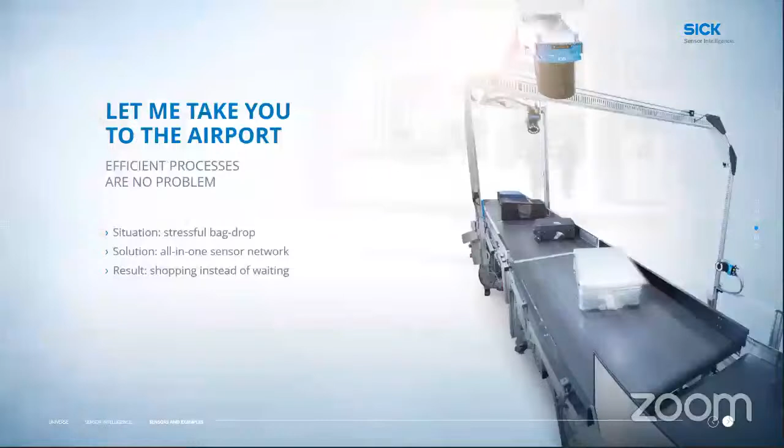So how can these companies benefit? We'll go through a few big examples you've probably already seen. So we'll take you to the airport. Most people aren't going to the airport very often these days, but we've created a lot of the systems with the airports to track your luggage. So as you now see the Industry 4.0 on your phone, where it says your bag has left this terminal or it's at this place - those are our solutions with not only barcode reading, but lately with RFID that you'll see soon from the other groups.

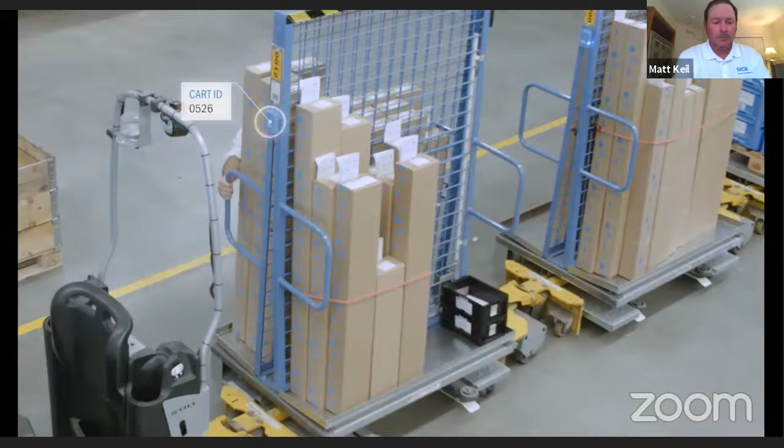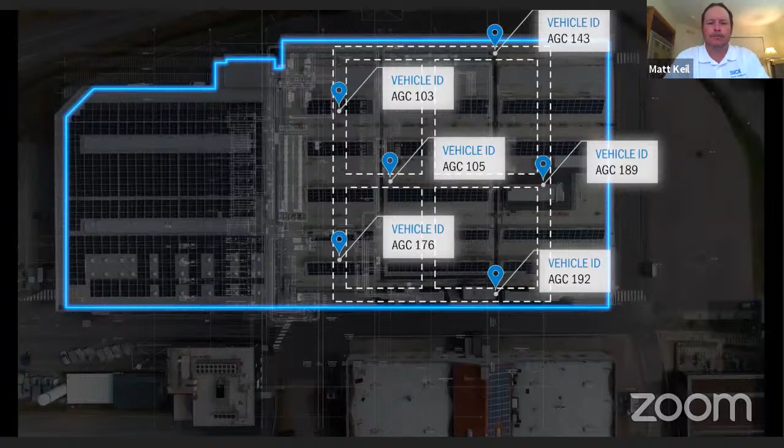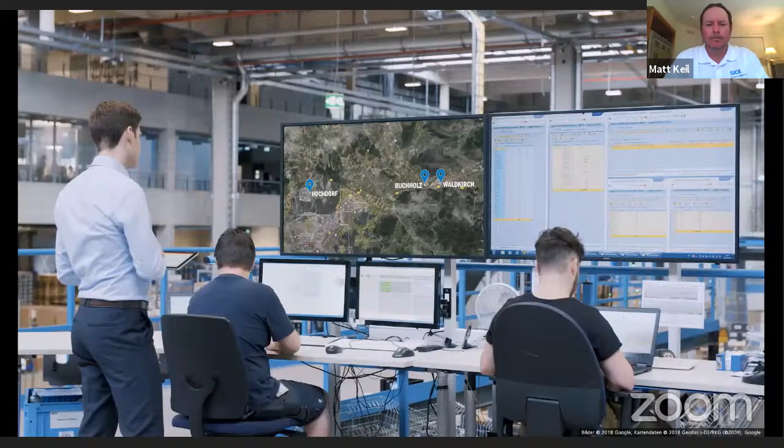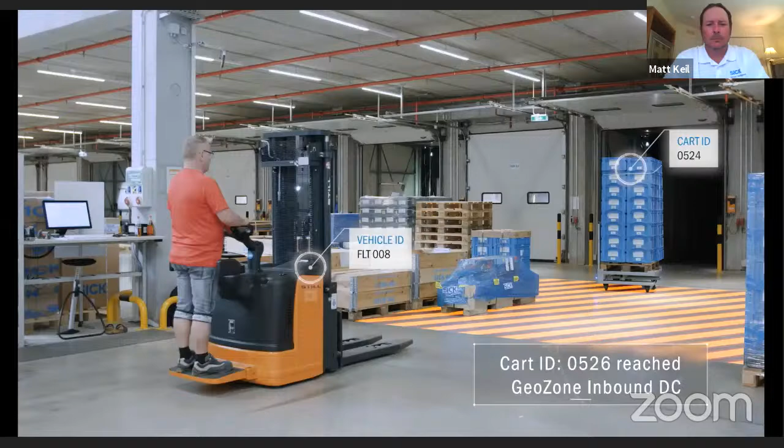Other conceivable applications are now in the planning stage. This is a flexible way of reacting to changing work processes, always with a focus on saving time and reducing costs through transparency. SICK uses a gateway system with GPS technology from its own portfolio for tracking company internal transport between different locations. In this way, we bring outdoor and indoor tracking together. In our own smart factory, we use either laser measurement technology or line guidance from our mobile platforms, depending on the requirements for positioning accuracy. Proven technology for automated guided vehicle systems. Localization is all about performance and accuracy. Our vision for the future is not fully automated production. Instead, it always includes a human, manual part of the work process. It will be about collaboration instead of competition, hand in hand, the best of both worlds. Transparency is therefore provided in both manual as well as fully automated processes, a guarantor for reliably provided knowledge on the shop floor. In the distribution center, material flow processes are managed with the help of localization solutions. In addition to controlling industrial trucks, there are also possibilities of locating goods that have not been tagged, because SICK has one of the broadest sensor portfolios for localization. For example, LIDAR technology is used to locate and track entire transport units in an area. This is real added value. With LIDAR's help, all moving goods on the shop floor that are not currently being tracked in a track-guided process can be detected and reliably assigned. Localization by SICK means that nothing remains unseen, all with the aim of transporting goods well, quickly, and safely to the customer. SICK goes further. Step by step, we are increasing our indoor localization capabilities and connecting them with the outside world. In this way, we are connecting the physical with the digital world, and our own world with that of our customers.

All right, pretty cool. I wish I would have turned the sound on earlier, but let me share my PowerPoint now. Make sure... there we go. All right.

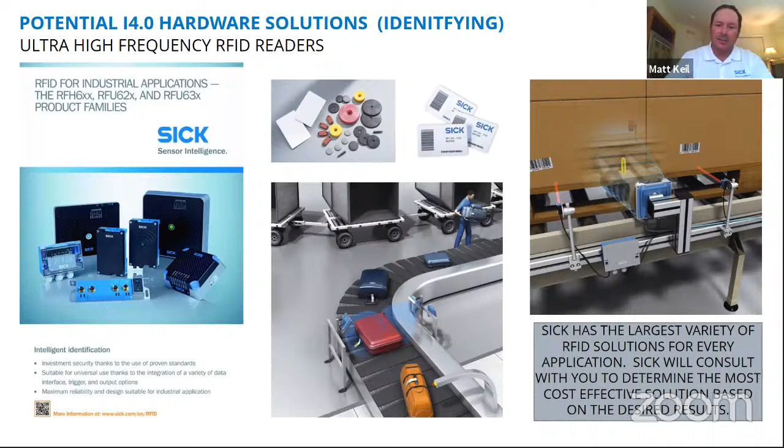The first is really the ultra high frequency RFID. That's been the game changer of moving to a long range RFID system so we can track things at a great distance or within a major pallet. The next major focus is going to be on LIDAR. What SICK did was, because of safety scanner technology that we tried to create planes with, we were one of the first to actually create LIDAR solutions that everyone's using now for autonomous vehicles.

Also different vision systems and simple proximity laser switches. One of our newest solutions that everybody seems to be jumping on because of its capabilities is our ultra wideband solutions. Now we have the ability to take tags throughout an entire facility, or even phones. I know a lot of phones are coming out with ultra wideband capability, and we can tag, localize assets, equipment, inventory, and even people.

Some of the stuff I was on a podcast or webinar about earlier this year regarding the new normal, and some of the things we're doing with localization, where we're actually tracking and tracing people within facilities to understand if different areas have been cleaned, or different areas where people have been in contact.

The other thing we have to have is a gateway to get these things to the cloud. So we'll talk a little bit about some of our GPS, our wireless technologies, our different gateways, and IO-Link, linking all those things together, so they're easily programmable.

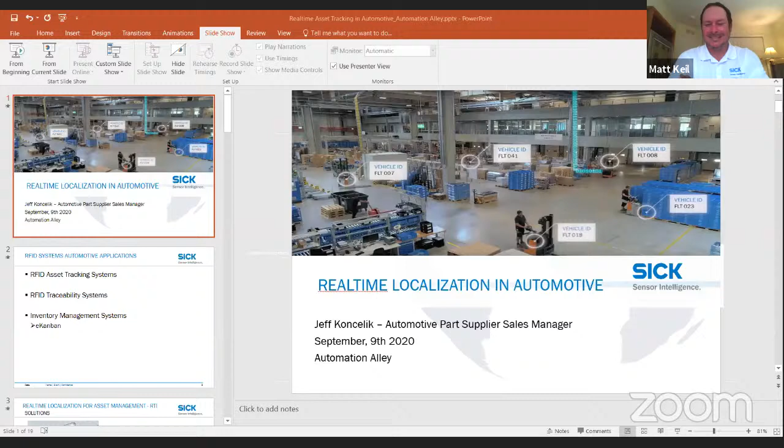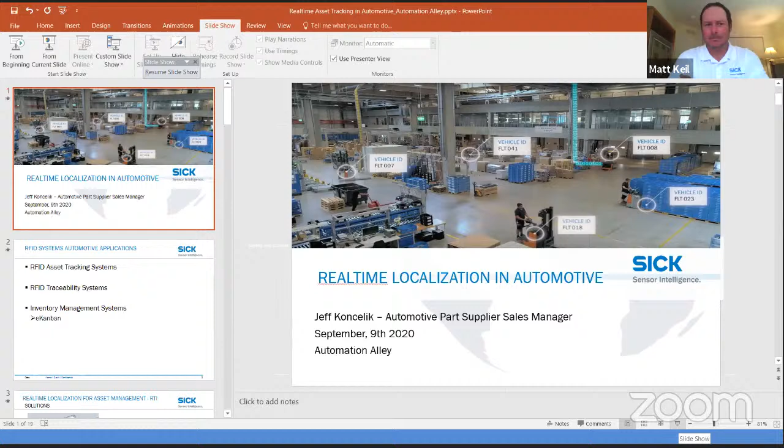So as Matt talked... and my screen's not moving. Okay. I'm going to stop sharing and try to share again. My screen seems to be locked up. Sorry about that. Virtual tech takeovers, yeah, there we go. All righty, let's see if this is going to work, hopefully.

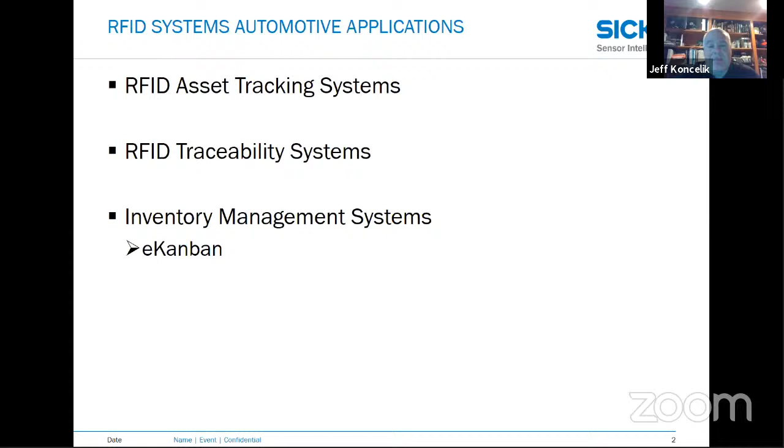So as Matt mentioned, we do have a lot of different technologies. I'm going to focus basically on the RFID systems that we have. Back in the day, RFID was basically for pallet detection, just 1, 2, 3, what pallet. We're getting into, you've heard the term asset tracking quite a bit. We're going to look at two different solutions, RTI and eKanban. These we see as trending applications that we're seeing a lot of visibility with our customers at the current time.

For those who don't know what RTI is, it's basically parts in a crate leaving one station, A, to go to position B, and that can be in your facility, leaving to load a truck, and then that part being accepted at a major end user. Or vice versa. You can also do shelving and things of that nature. Anything that would have a tag, we can track. Within our system, we can identify all the parts in the crate. We're not unlimited, but we do have a very high cycle, and it depends on the part size and things of that nature. We're seeing this application come into play, and we'll jump into more detail coming up.

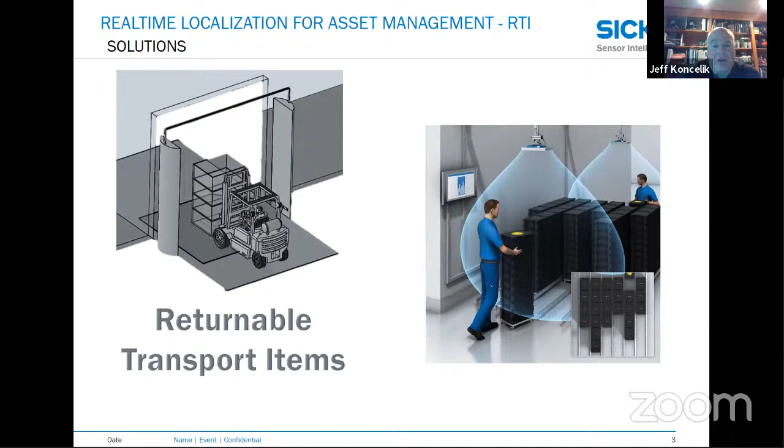The second one I mentioned was eKanban. If you know what Kanban is, it's basically a feeder system for raw material in an assembly. Typically they would have a card within each of these boxes or totes identifying what that part is. The problem is, in the manufacturing process, you don't know when you run out of parts, and it's a visual accountability to see when that change has to be made, and then you have to make a call to someone to bring more parts.

In our system, it's all RFID. We follow the parts through the manufacturing process, so we know if the tote has, let's say, 100 parts in it. As we're taking parts out and those move along in the assembly process, we're tracking all that to your ERP system, your cloud system, whatever. As soon as we detect whatever that minimum level is, which can be set, that signal gets fed to the right people so that we have just-in-time delivery of those raw materials, and that way it's more efficient. But again, we'll dive into that a little bit more as we move on.

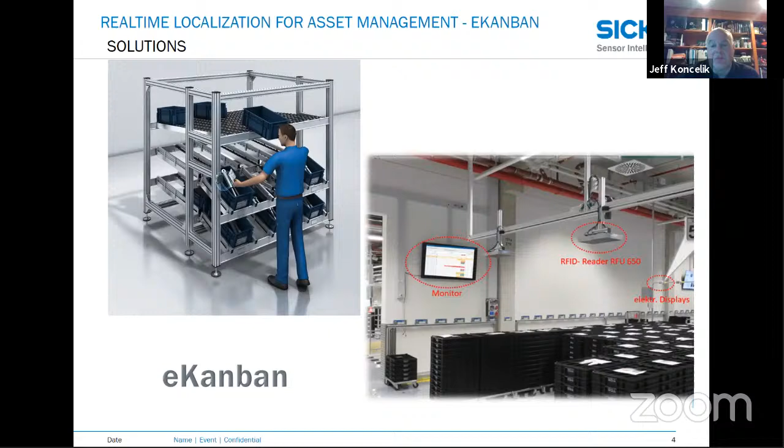Just to give you an idea, I wanted to touch base on the portfolio of what we do from identification solutions. Matt mentioned we have barcode scanners, vision systems, and handheld scanners, but I'm going to focus on the RFID.

The reading gates are part of the RFID or RTI, which is basically having a pallet, and it's not just reading the pallet, it can read the parts in the pallet. So we want to make sure we're shipping the right part to the end user. Or if we're supposed to have 100 pieces and we only have 99, we'll be able to detect that and correct the shortage as we move forward. The tunnel is the same type of thing. If you're in a conveyor type system doing the same process, our tunnel system basically does the same concept. It involves a little more product from a different end, but at the end of the day it's the same solution. So we can do it whether we're driving a tow motor through or working with conveyors.

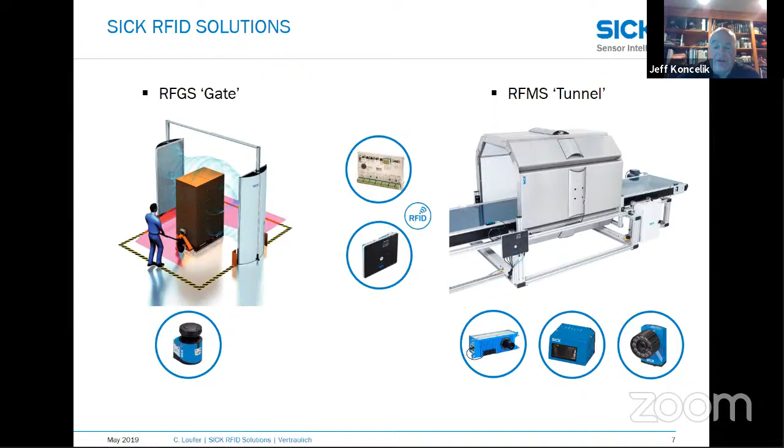Just so people understand the process, I think this is a pretty interesting slide. The parts supplier builds the parts, packs them, ships them, gets them labeled, and then sends them outbound. All these stations here are points where we can be tracking RFID so that we make sure we have the right parts, the right quantity of parts, and it's going to the right place. And then as Matt showed in the video, once it gets transported, we can follow that as well. So we know that truck is going to the right plant, the right dock. That helps from not losing packages.

And then once the end user receives it, here's all these points where an RTI system could be used through the whole process. So we can pretty much, the terminology being cradle to grave, follow the part from the beginning to the end to make sure we have 100% accountability that you're getting the right part, the right number of parts, and it's very feasible for both the supplier and the end user. There's no 'hey, we got shorted, you didn't ship us the right thing.' We have that visibility. So it's becoming a very hot trend for us.

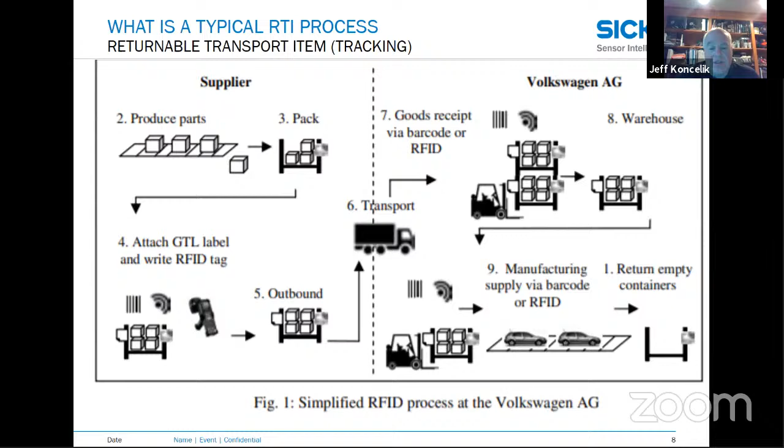It's one thing interesting, we're talking automotive here, so that's our expertise mostly, but this is not just for automotive. It can be for logistics, it can be for warehousing, anywhere where a part's going from point A to point B, our systems can be used. And again, the fact that we can customize a solution to your requirements puts us in just about any application you can see fit that we can work with. So a big advantage for us.

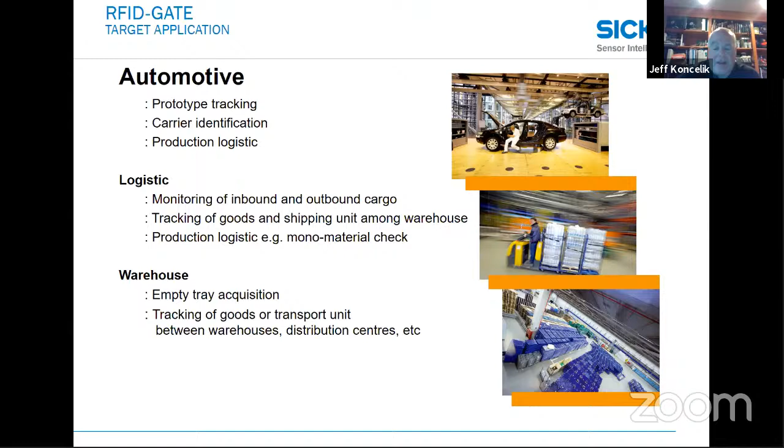Just why, getting back to RTI, what are the advantages? I talked a little about this, but it identifies and prevents losses. It's just in time delivery, and that's important. I think every part supplier and end user today is working on just in time. And if a part doesn't get delivered when it's supposed to, that causes a lot of headaches for a lot of different people. As I mentioned, we have consistent visibility of the flow of the process. So it's not just 'here's your parts, good luck.' We can follow it all the way through the process. By controlling the system, we also don't need unnecessary purchases. A lot of times people will buy more than they need to make sure situations like this don't arise. So there's huge cost savings in that.

The other big thing we find, in all honesty, is when it comes to locating parts. How many times have customers put a crate in a plant, and then the next day they can't locate it for some reason? We can track that down anywhere within the plant, and that's a pretty big advantage for us. That's pretty much the advantages of why RTI is a very good solution for us.

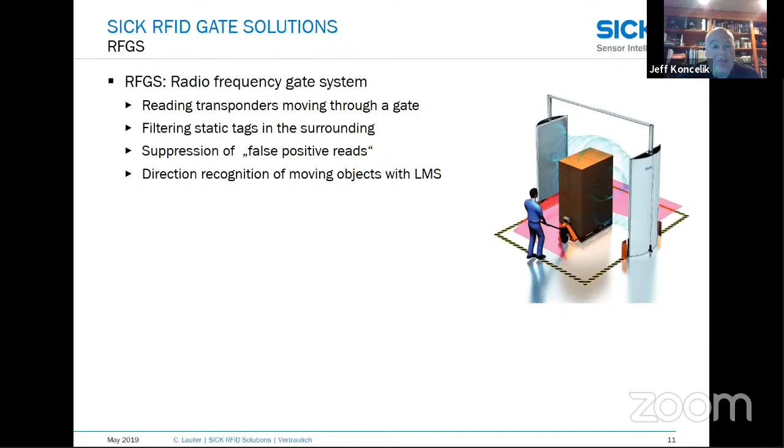I'll get back to the reading gates. I'm going to jump this slide because it's a little redundant, but I am going to get into it.

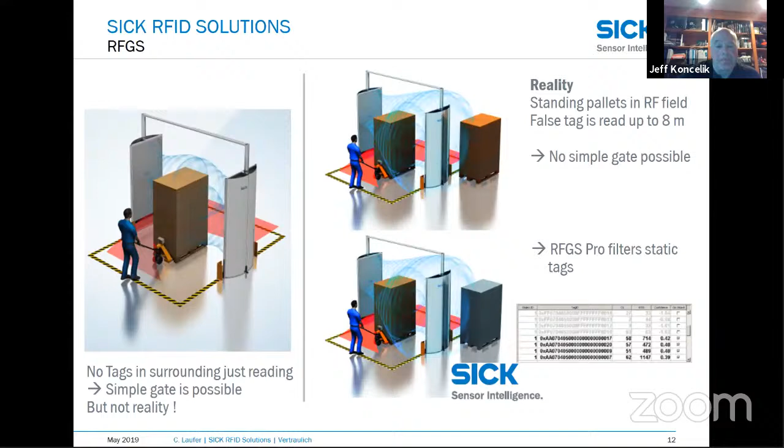Again, we can customize a solution for you or your customers depending on your requirements. It's not limited to this, it's just a matter of, kind of, sky's the limit and seeing what we can do.

So just to review the eKanban, basically the motivation here is efficiency, right? There's optimization in both systems, a lot of track and trace, error-proofing, as we talked about earlier.

I'm not going to be redundant and go over some of this, but just making sure we have the right parts, make sure we have the right container. The RFID is integrated into your ERP system, into the cloud, the higher level system you're using. So it's definitely Industry 4.0 ready. There's a lot of information we can bring, and it's a good advantage for us.

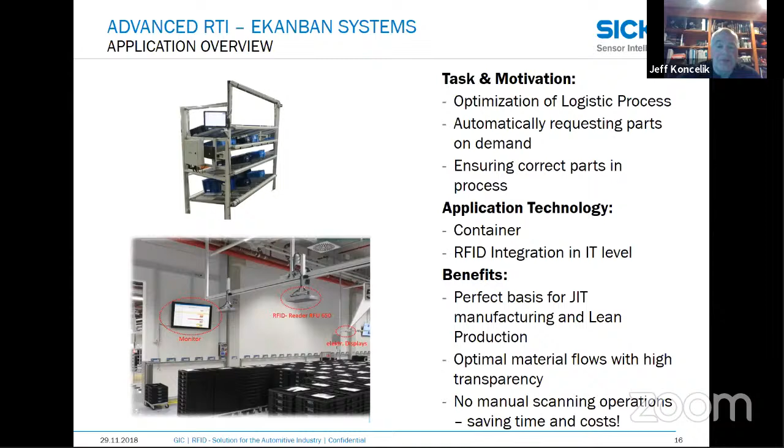I believe this is probably getting down to my last slide, but at the end of the day, it's again lean manufacturing, just in time. That's probably the most important thing for our customers overall, whether it be the supplier, the OEM, or even the end user. So that helps. Again, it's the whole efficiency of making sure we're getting the right parts, the right number of parts, controlling the variance of parts, that we're just delivering what we're supposed to be delivering.

We're seeing a lot of requests for the eKanban, or what they're calling supermarket or e-supermarket systems, which are basically larger scale systems than this. This is just showing one rack. We're being asked to work with a whole racking system within a whole warehouse or even a manufacturing process from start to end.

Again, it's becoming a very popular trend. I know a lot of companies are looking into this. There's not very many people from a competitor standpoint that do this. Again, one advantage SICK has by having the portfolio of products is we can customize a system for you, whether it's vision or barcode, and we do that almost daily.

People mix technologies because of the different requirements from their end users. So it gives us the advantage to say, all right, we'll use a barcode reader here, a machine vision camera here, oh, and by the way, we'll use an RFID system here. So again, flexibility on SICK's part is a good advantage for us.

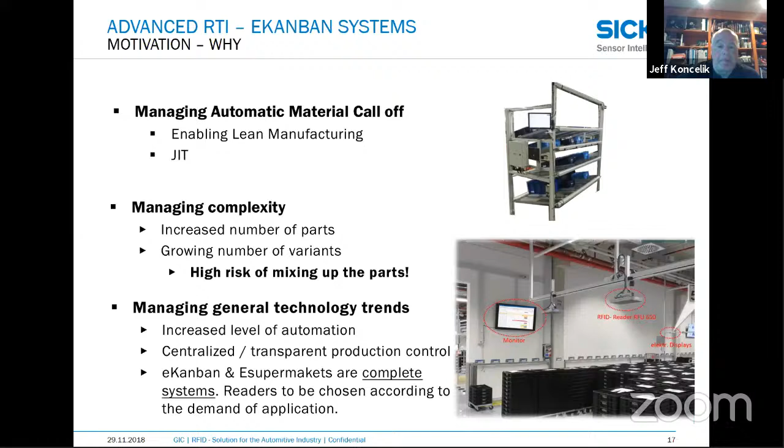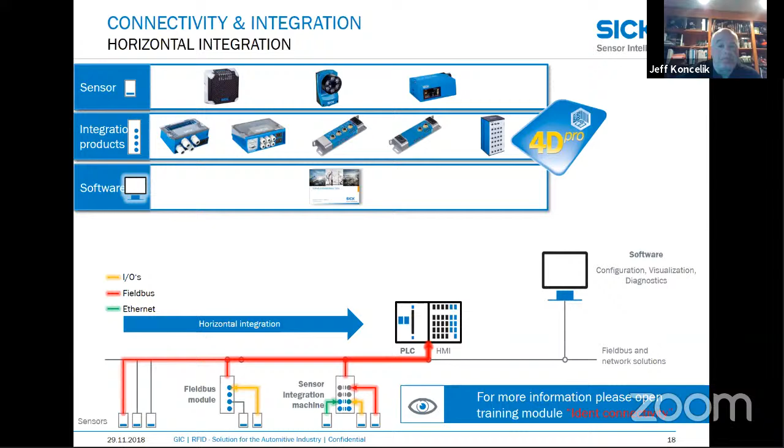And with that, that's my presentation. I'm going to turn it over to Mr. Jeff Riemer as he talks about some of the trends in the tire industry.

Good morning, ladies and gentlemen. Jeff spoke at pretty good length about generic part flow within the industry, and I'd like to zoom in a little on one specific component here. Specifically, a component we're all familiar with, tires, but what really are the use cases for tires? Why are we even having this conversation about RFID?

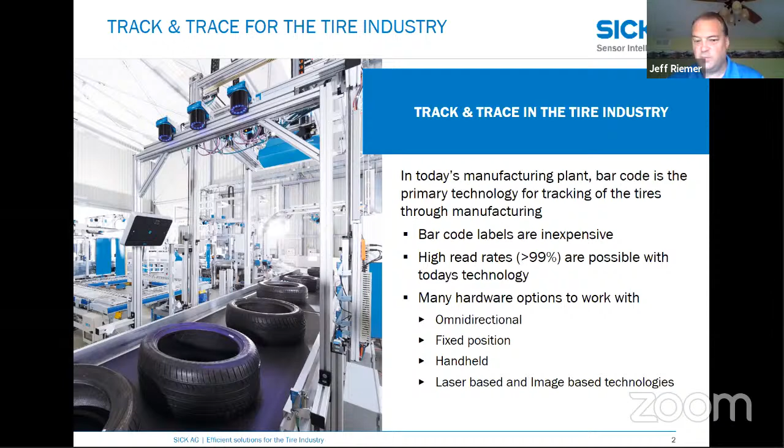The reality is that right now in the manufacturing process, tires are tracked throughout the entire process using a barcode label. There's a barcode label on every tire, and the read rates are very high. There's an extensive network of hardware available to read barcodes - omnidirectional, fixed position, handheld. There's been a number of systems developed by SICK as well as other competitors in the market for reading of finished tires, green tires, bottom reading, consumer labels, and on and on.

So why are we even having a conversation about RFID? There are tens of millions of dollars of infrastructure in barcode in the plants now. So what advantages does RFID bring? Why look beyond that?

The first thing to realize is that RFID has overcome all of the technical hurdles to be a viable option for the tire industry. Tires go through a curing process, which is a high temperature process, and the high temperature ratings for the tags are sufficient to withstand that. There's been extensive lifespan testing completed to make sure the tags will survive not only the manufacturing process, but well beyond that into the use cases from the end users of the tires. The processes for affixing those tags into the tires are pretty well established, and UHF technology offers practical read-write ranges for use in the plants.

This is not really a new trend. The automotive industry, together with the AIAG, began a process of standardizing RFID tags as early as about 2001, 2002. And so there are now current unified standards, adopted in 2019, that standardize RFID tags for tires globally. All of the major players - the Goodyears, the Michelins, the Bridgestones, the Continentals, the Pirellis, and everyone else - were part of the groups that participated in the standardization of those tags. So now we'll end up with tags that everyone will be able to read, and all of the end users beyond the manufacturers will also be able to work with.

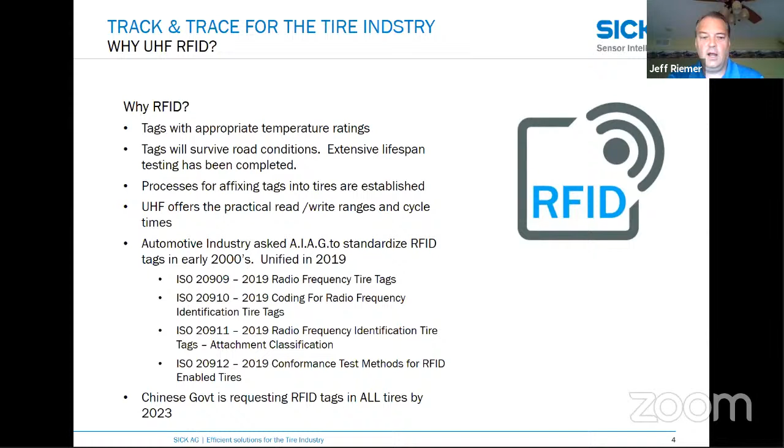It's also important to note that the Chinese government is requesting RFID tags in all tires sold in China by 2023. We'll get into a little more about why specifically they're asking for that, but that's a large driving force. Obviously there's quite a few vehicles and a growing number in China, so that's having significant impact on the market as well.

So what does RFID offer us? Why all of this effort and why this growing trend? The ability to write data throughout the life cycle of the tire is an important piece, and it's critical to remember that the life cycle of a tire is far beyond manufacturing. It also includes logistics and warehousing, fleet management for people who operate large fleets of trucks, and there's also a significant piece for the consumer market, with the retreading market being a large factor as well.

RFID offers better performance in dirty environments because we don't have to worry about the optical scenarios we have with reading barcodes - we don't necessarily require line of sight for read or write. Two big advantages we'll drill into more are that the RFID tag offers counterfeit protection and it also facilitates recalls. The counterfeit protection - it's kind of strange to think a tire could be a counterfeit item, but it's a real thing and a growing trend unfortunately in the marketplace today. It presents a significant safety concern and undermines the business of legitimate manufacturers as well.

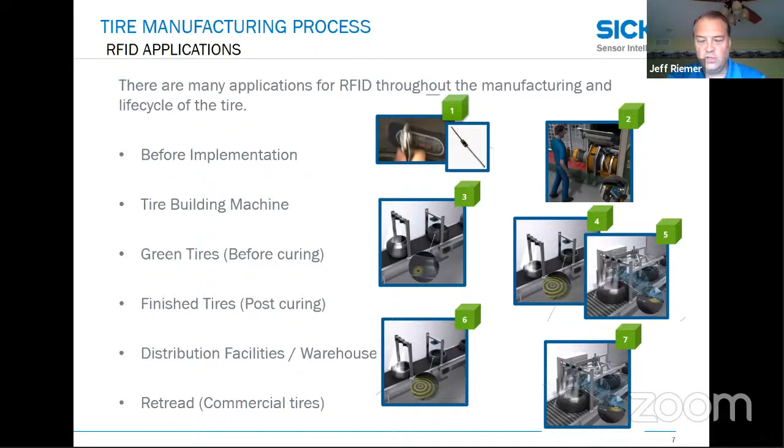So the use cases for RFID for manufacturers within their plant really begin even before we put a tag in a tire. Before implementation, it's read again at the tire building machine, read again before and after the curing process, then throughout the finished tire, out through the distribution facility, and we'll see those tags again when they come back to the retread.

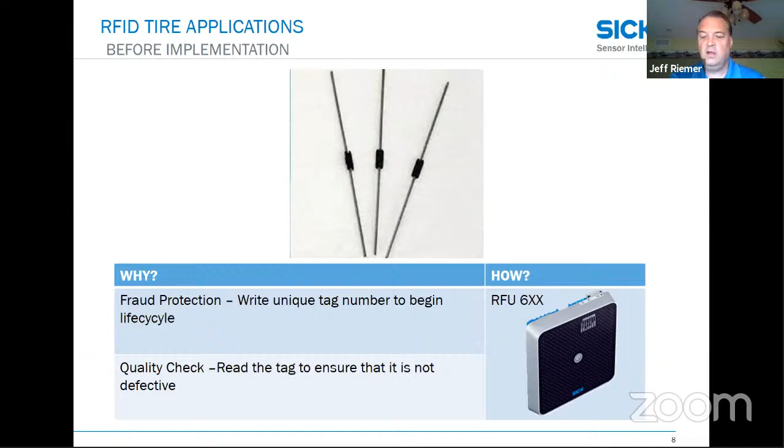Before application, before we even put the tag in the tire, we're probably going to read that tag to verify that it's functional and maybe establish a unique ID number. We want to verify that before we put it in the tire, not afterwards.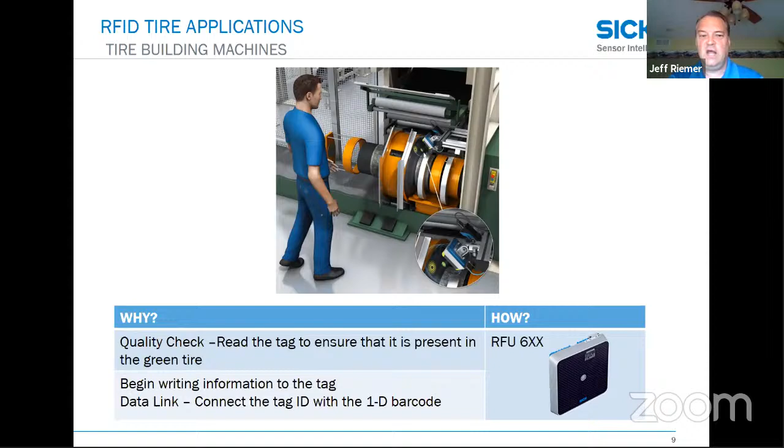At the tire building process, we will also verify that the tag is present and establish a link between the RFID tag and the 1D barcode so that those two are tied together in the MES system. These applications are pretty much core product. You can mount a standard read-write antenna device nearby and read the tags directly on the drum.

As we look beyond that, and we now have a tire going to the curing department, it's a little more involved application because the tag could be rotated anywhere within 360 degrees. Under those scenarios, we're going to be looking at a larger system with a multitude of antennas to correctly find and read or write to those tags.

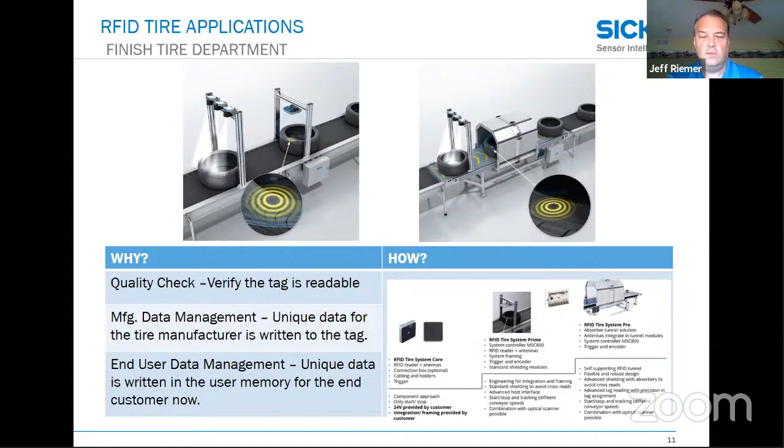Once we get to the final finish department, this is typically where we see manufacturers beginning to write end user data to the RFID tags. This is data that will be utilized by the people who buy the tires, not necessarily by the manufacturers. There's a separate storage space on the tag reserved specifically for the data they request. It's also true that all the manufacturing data - what plant, what time, what date, etc. - will be embedded in the tag as well.

Logistics and warehousing will also utilize RFID tags for many of the same reasons. Since tires are often shipped through importers, exporters, wholesalers, and retailers, it also provides an opportunity for fraud detection. So if there are tires entering the supply chain which are not legitimate, those tags can be identified and sorted out.

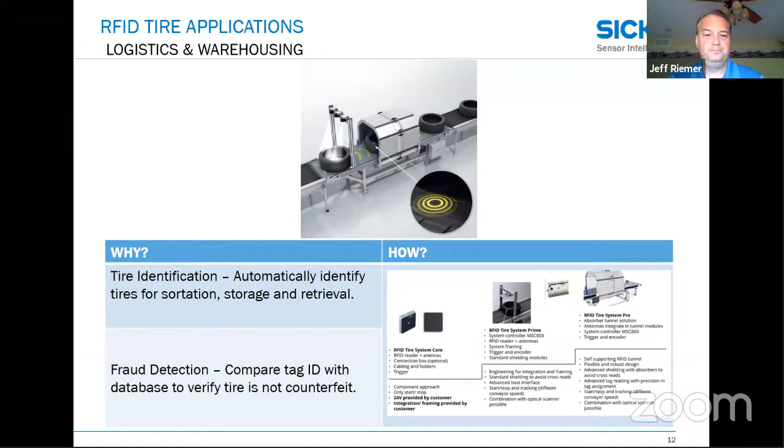It's important to recognize that the tire is definitely identified as a safety critical component on a vehicle. Due to this, the US government in 1970 created something called the tire identification number. It's a 12-digit code molded into the sidewall of every tire you manufacture, and it identifies the manufacturer and the plant it came from, tire size, the specific type of tire, as well as the week and year of manufacture.

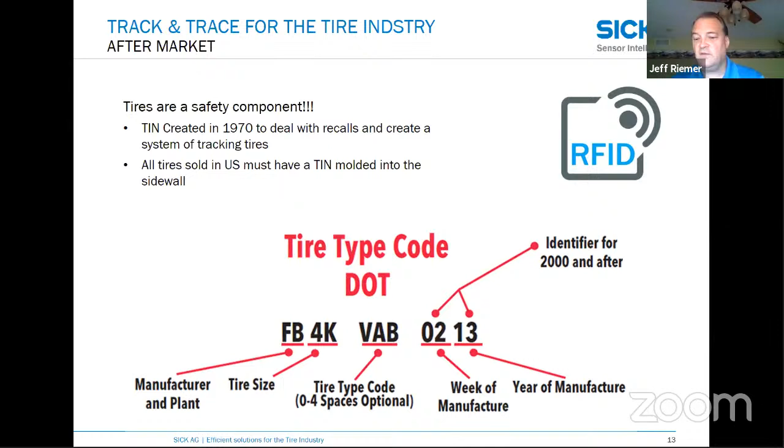This was done largely to facilitate recalls of tires. The problem is that it's a very tedious process for someone in an auto shop to look at the tire identification number on the sidewall, manually write that down, go to a database, look up each of the 4 tires, and decide if this is a tire that is under recall or not. The practical reality shows us that's not happening in today's world.

The average return rate for defective tires in a recall runs about 30%. It's a highly variable number - sometimes as low as 10%, in other cases as high as 60 or 70%, but it's nowhere close to 100, and the average is around 30%. That's because it's a very manual process.

The issue that leads to is the fact that there are millions of defective tires on the road. There are a number of cases where recalls have been issued for known structural defects in tires. Those tires have, for whatever reason, not been pulled off the road or off that individual vehicle, and they've ended up in catastrophic failures, resulting in injuries and death for people. That's a nightmare scenario for everyone involved with the supply chain, not to mention the folks involved in the crash.

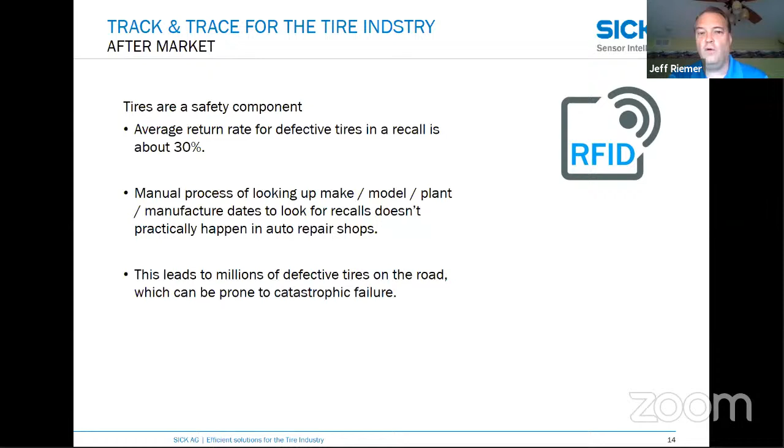So the thought is that if we have RFID tags in tires, it can be as simple as using an automated handheld unit to scan those tires. If those tires are subject to recall, they can be identified very quickly and easily. It's better for the consumer, it's better for the manufacturer who gets rid of defective product, and it makes a much better system overall for the industry to work with.

There's also an aspect of this industry that most people probably aren't aware of, and that is used tires. The Rubber Manufacturer Association estimates about 30 million used tires are resold every year, primarily in the commercial vehicle market for truck and bus type tires. But since there are multiple layers in that channel, it's almost impossible for tracking to occur. The age of the tires isn't regulated, nor is there really any way to know without manually looking up the tire identification number.

Data has shown that tires over 6 years start to show a much higher rate of catastrophic failure. There are chemical changes and wear in the rubber and compounds that simply don't last forever. So automotive manufacturers, together with tire manufacturers, are working with systems where we can write data to the RFID tags in tires to record things like temperatures, vibration, and pressures, so that people working in the used tire market will at least have a little bit of data on the past history of those tires and what they've been subjected to. As it is now, they're pretty much cleaned up, sometimes painted, and it becomes buyer beware.

Retreading is kind of the last step of the process. For commercial tires in use out there, I'm sure you've probably seen retreads that have peeled off and are laying by the roadside or on the highways. It's pretty common in the commercial tire market to retread tires. After fuel, tires are the next most expensive component to operating a fleet of vehicles, so retreading presents a lower cost alternative.

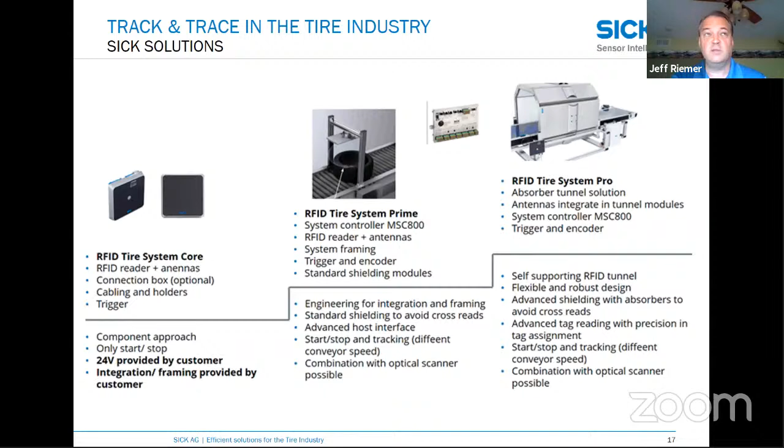So SICK has designed a portfolio product. This is not a one-step process. We're talking about reading and writing RFID tags from the very beginning, before they're even placed in a tire, all the way through to complete tires in logistics and beyond. We have a scalable approach, from a core product where manufacturers ultimately take responsibility with some support from us for the overall performance of the system, up to and including complete turnkey systems where SICK is responsible for the overall performance of the system.

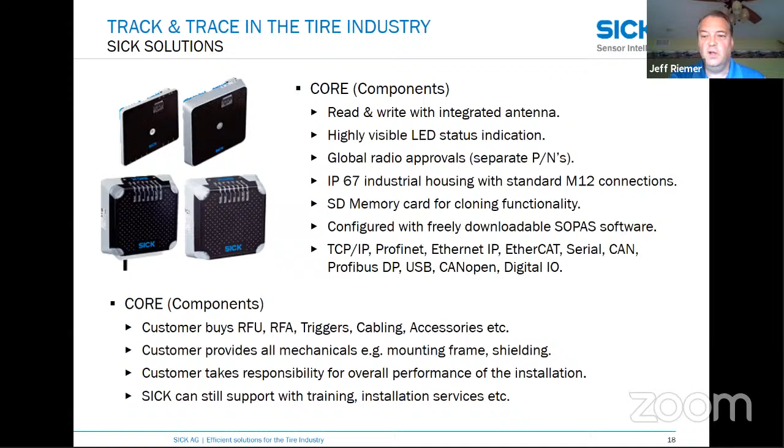At a core level: integrated read-write in a single housing, IP67, strong LED indication, SD memory card for cloning functionality, and the built-in protocols people are looking for in communication. This is a scenario where the manufacturer takes responsibility for the performance of the system. We also sell a higher end system where SICK takes responsibility for the performance with guarantees of read rates, et cetera. We start talking about start-stop functionality and integrated tracking, and a controller that coordinates all of those efforts.

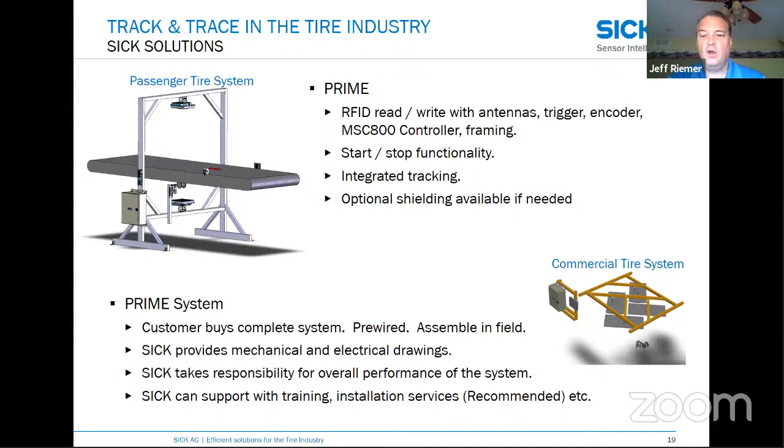Beyond that, at the high end, you take a lot of the components from the last system, add a bit more flexibility, and provide shielding to the system, and you end up at our pro concept. The shielding is important because as we read-write to any item, we want to make sure we're reading and writing to the correct item and not perhaps something on a conveyor overhead, laying on the floor next to it, or on a next door conveyor. So the shielding allows us to control that if necessary in the environment.

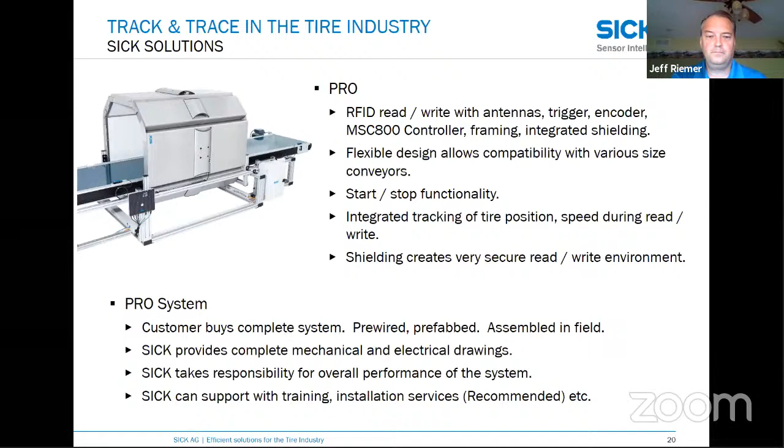So a little look at the RFID in the tire industry and where we see that industry going. And with that, I'll turn it over to my colleague, Tom Bonucchi.

Thanks, Jeff. Get the sharing here.

All right, so a quick introduction of myself. I'm Tom Bonucchi. I'm on our transport logistics team, the sales manager for the team. I've been with SICK for a little over 15 years, working with mobile platforms and mobile vehicles, and I live in Southeast Michigan near Auburn Hills.

So the focus of my presentation today is going to be on localization specifically for mobile vehicles. It's taking a second for the slide to advance.

SICK has a wide range of offerings for mobile platforms, and we have something that fits pretty much any of the mobile platforms out there today - anything from small autonomous mobile robots all the way up to fully customized AGVs. We're seeing these autonomous mobile robots becoming more popular. These vehicles replace anything from a push cart, sections of conveyors, forklifts, and even floor cleaners within a facility. As use cases continue to evolve, SICK's going to be there to provide the right solution. These solutions fall into primarily three categories: navigation and positioning, environmental perception and safety - your general sensors for collision avoidance - and load handling sensors.

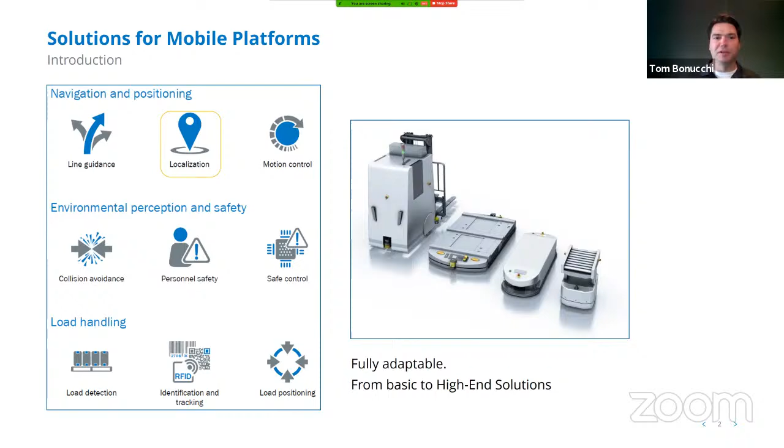For well over 20 years, SICK has provided safety-rated LIDAR sensors for autonomous vehicles, and these provide the critical eyes into the surroundings for these vehicles. This non-contact safety technology is highly configurable, adaptable, and really helps work within the vehicle surroundings.

On the slide here, you'll notice some colorful shaded areas around the vehicles. In these two pictures, what you're seeing is the warnings and the stop fields. This is kind of a traditional use of a LIDAR sensor on an AGV, for example. You'll have a field that tells the vehicle to slow down, and another field that tells it to stop. So if a stationary object, a moving object, or a person comes into the path of the vehicle, these sensors allow it to maintain control and avoid collisions and injuries.

In the right-hand picture, you'll see a little white box showing a bunch of green lines - that's depicting the raw data these LIDAR sensors are generating. The LIDAR sensor is scanning the environment, and it provides a bunch of different data points that can be used for localization.

In addition to autonomous vehicles, a lot of those sensors have become quite common as autonomous vehicles have been produced over the last 20 years, so you've probably seen those within facilities.

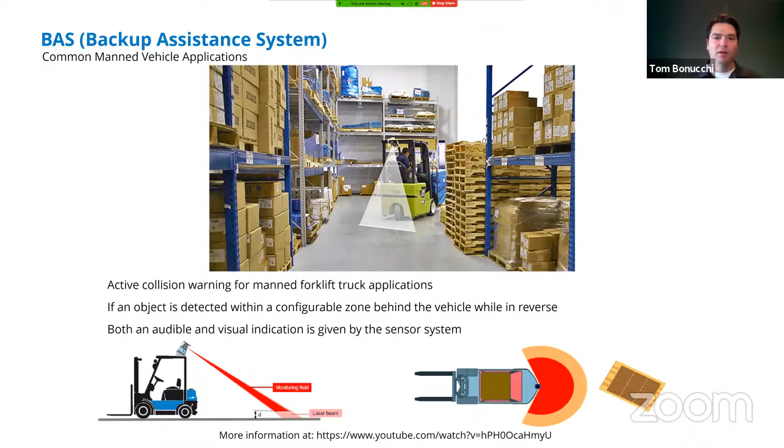Before I dive right into the localization solution, I thought it might be interesting to talk a little bit about the basic functionality of a LIDAR sensor.

LIDAR is actually the blending of two words - light and radar. LIDAR uses light to illuminate a target, and like radar, the device calculates the amount of time it takes for the light to be sent from the sensor, bounced off an object, and then used to calculate the distance. In the case of a SICK LIDAR sensor, we're using invisible infrared light, so it illuminates the surroundings without actually being detected by humans - you can't see the light.

The laser is pointed internally in the sensor onto a spinning mirror, and that spinning mirror spreads the light across the entire room - that's what this picture in the middle is showing. It's taking a snapshot, and this happens very quickly - the spinning mirror finishes a cycle in as fast as less than 10 milliseconds, depending on the scanner. As that light is cast around the room and measurements are taken, since we know the position of the mirror, we can calculate the distance and shape of any object within the field of view. That's what the bottom picture is showing - you've got square, round, and octagon-shaped objects as examples there.

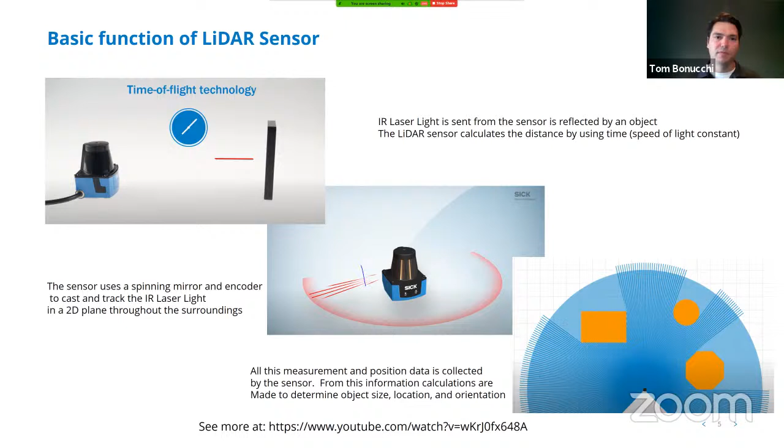SICK has actually been doing localization for almost 20 years now. We've had solutions starting with our NAV 200. What that scanner did was it was a dedicated scanner that was mounted high above the vehicle, above any pedestrian traffic that might occur within the facility, and it required reflectors to be mounted on the walls or posts within the facility.

At the time, this provided a fantastic alternative to more conventional means of navigating a vehicle, such as in-ground wire line guidance or magnetic tape. It's a much cleaner look, it reduced the maintenance of the vehicle fleet overall, and it provided a lot of path flexibility. You weren't tied to that specific line that was already in the floor.

You actually could navigate using the laser and adapt your path basically at will. As technology has evolved over time, these scanners have become smaller, faster, more accurate, more repeatable, and computer technologies have evolved as well. So we're able to actually analyze a whole lot more data much faster than we could previously in the older systems.

Fast forward to today, and what we have today is a product that we call the LIDAR LOC. It's a combination of a LIDAR sensor, as I described in the previous slide, and then a controller and software. What LOC stands for is an acronym for location on contour.

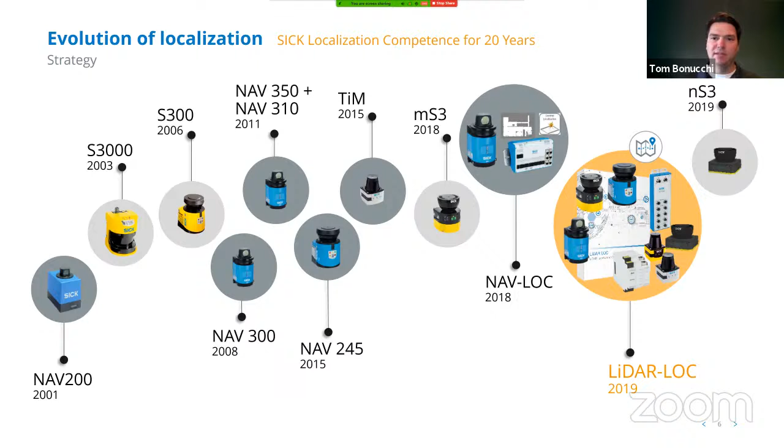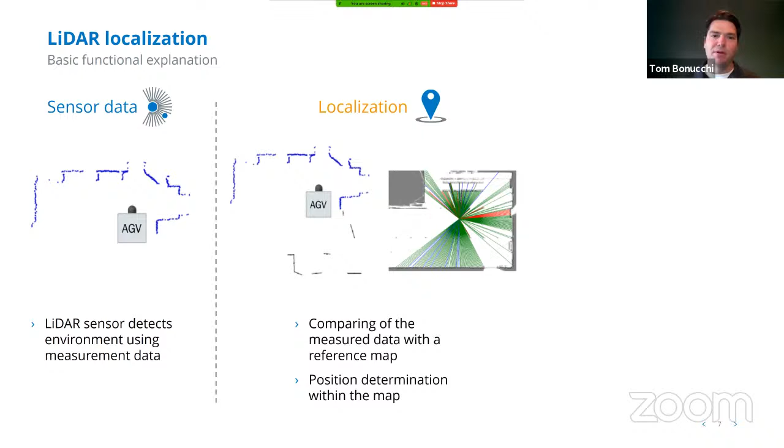What this system is able to do is it analyzes the measurement data I mentioned previously, pulls all that information in from the sensor, and then creates a map of the environment. So that's what we're seeing here. All these contours, these blue dots, this is measurement data from the sensor, and that's showing what the walls and doors and so forth within a facility would look like.

That information is captured by our LIDAR LOC system, analyzed by the software and saved, and that creates a predetermined map. Then that data is used by an upper level control system that creates the path for the vehicle. So the system can really kind of be thought of like a combination of a GPS and autopilot system that you might have, for example, on a plane or a boat.

The difference being that LIDAR works indoors, so obviously you can't use GPS inside a building because you don't have line of sight to the satellites. And it's also several orders of magnitude more accurate. We can get down to a very fine accuracy and repeatability with a LIDAR sensor.

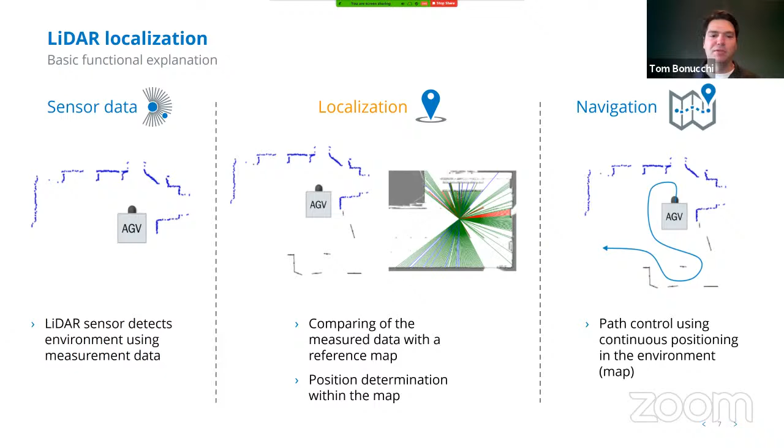So the solution, a couple things that are kind of unique about the SICK LIDAR LOC: it's very versatile. You can use it in any type of mobile platform, as I mentioned earlier, and that's not limited to just automated vehicles. It also would work in a manned vehicle.

You could actually take a small compact sensor, our small controller with the LIDAR LOC software on it, and install that on, for example, any manned forklift. It could be a 10-year-old forklift that's roaming around the facility. And instead of having to radio the operator to find out where they are, or just look out in the building, you could actually send that information from the LIDAR LOC software up to an upper level warehouse management system, or even to a cloud.

The data that comes out of the LIDAR LOC is actually reduced down to basically three things: it gives you an X and Y position within the facility, and then a rotation angle of the vehicle, so you get the heading of the vehicle as well. So you could quickly monitor an entire fleet of vehicles.

You could analyze that data using spaghetti diagrams to figure out maybe where you have high congestion and optimize some routes. And when it comes to autonomous vehicles, if you had a LIDAR LOC system on your autonomous vehicles and also on your manned vehicles, if for some reason there's congestion with manned vehicles, you could actually have the autonomous vehicle automatically reroute and take a different path to avoid that congestion.

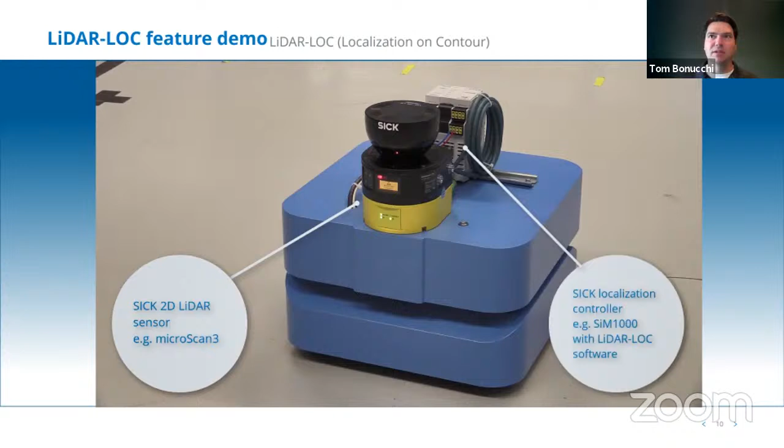In this particular example, this is a very small little AMR. It has one of our safety scanners and then that compact controller. We can put a vehicle in any environment.

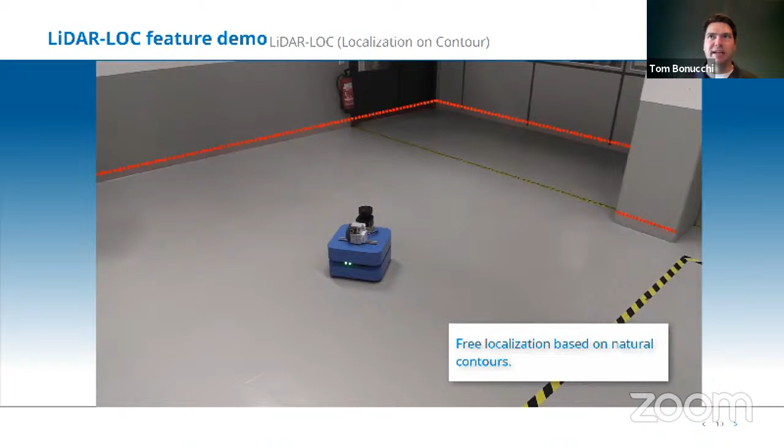It scans the existing infrastructure, walls and doors and so forth, and creates all these scanned data points. Another cool thing is our software is all web-based, so you can log into it from a web browser—you don't have to install anything. So what this is showing here is the position of the vehicle.

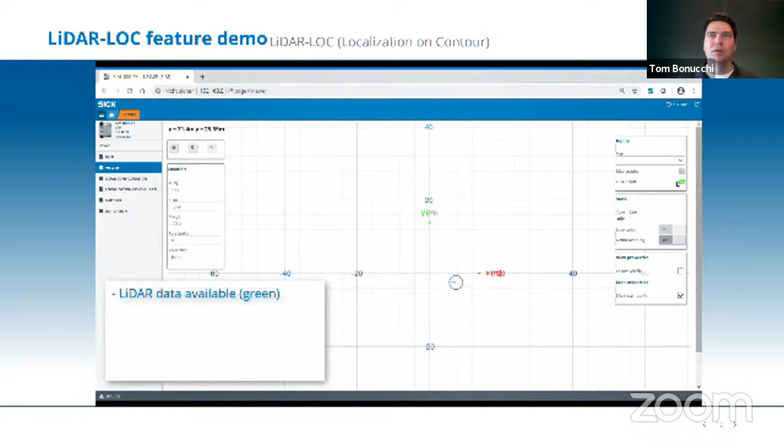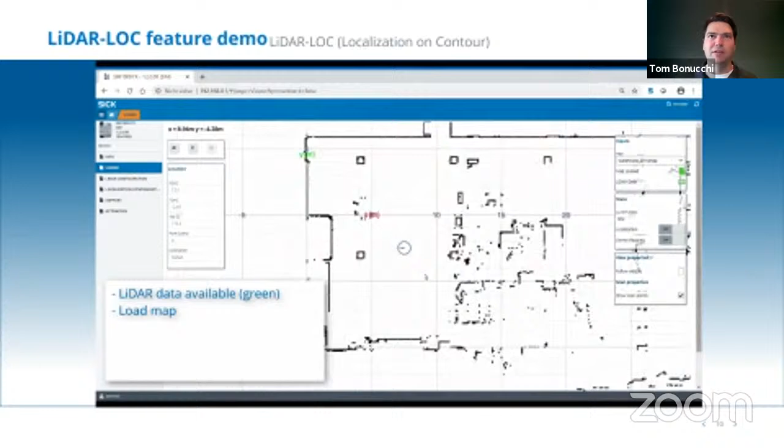Here's that map of the facility created by the LiDAR-LOC system, and they can zoom in on where the vehicle actually is. Now they're enabling the system, and those red dots are the live scans that the vehicle is seeing within the facility.

What this video is going to show is one of the main benefits of our solution: dynamic environment handling. We can operate with a much reduced view of the surroundings. Here they're showing that a bunch of objects have been placed in the vicinity that weren't there when we created the initial map—you can see that in the upper right-hand corner, those 6 boxes that weren't there before. They show up in red, and the vehicle is able to navigate all the way around any of these and still maintain its location. It's a very, very robust solution.

As I mentioned earlier, this is a different vehicle configuration, so it has a different safety scanner in the front and one of our low-cost TIM sensors in the rear of the vehicle. We're able to blend the data coming from 2 different LiDAR sensors too.

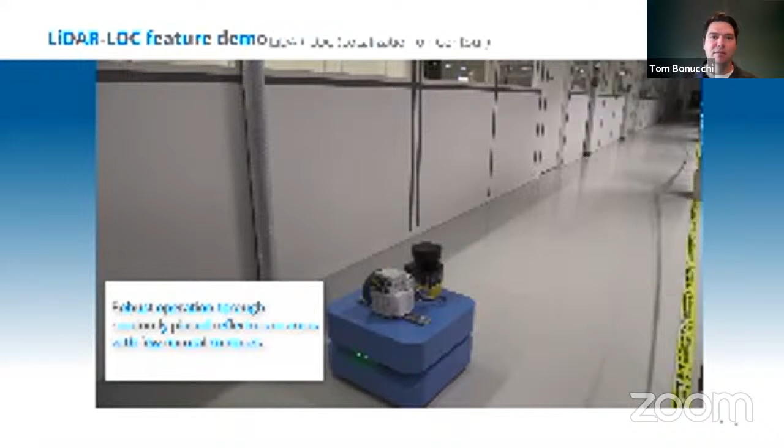What this is demonstrating is we can also take in inputs from the encoders and follow vehicles that have almost no view of their surroundings and still get accurate position. We can also add reflectors that don't need to be surveyed in any particular location—they can be located randomly. So if you had a really long corridor or maybe a bunch of shelves that all look the same, you could mount a couple of reflectors and increase the robustness of the system further.

Here's another view, kind of an overview of what the LiDAR-LOC software provides. One of the new functions we've added is we can record the environmental raw data. This allows the end user—someone building their own AGV or retrofitting an existing vehicle—to do this scan themselves. In previous versions of the software, we had to send out someone from our global service group to do that for you, but now that's something that can be done by the operator.

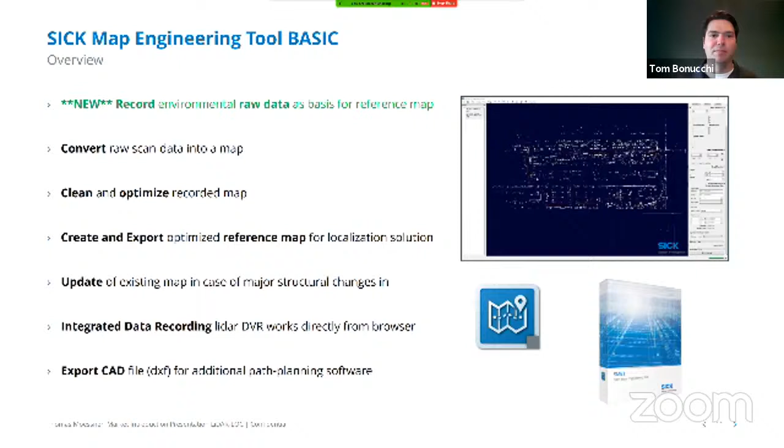We've also added an integrated data recorder—it's kind of like a LiDAR DVR, and it works directly from the browser, so you don't need any extra software to enable that function. We can also export a CAD file, so if you want to import that into path planning software, for example, it's an easy file format to work with.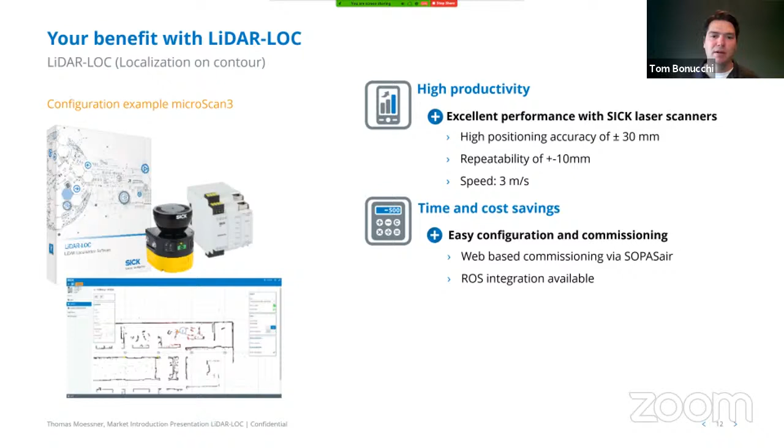Cost savings, it's easy to configure. As I mentioned, it works on a web-based system called SOPAS Air, which is SICK software running on our CPU, and you can access it from virtually any web-based browser.

We also have ROS integration, so if anybody's using ROS, Robot Operating System, we can connect directly to that for doing path planning and so forth. And then some of the intelligent functions...

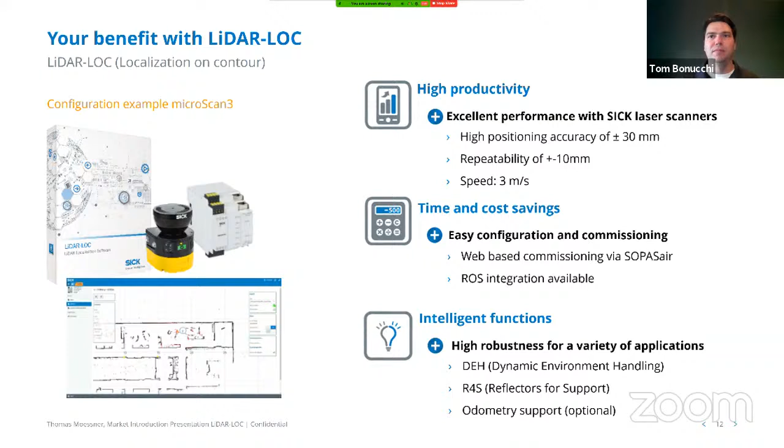The system can really work well in a highly dynamic environment. Even with pallets, forklifts, and a lot of foot traffic constantly moving within the facility, we only need a small amount of that original map view to successfully navigate and localize. We've also added reflector support and odometry support with encoder inputs. So you can add reflectors to the vicinity if you've got long corridors and lots of racking that all essentially looks the same — you can differentiate that pretty easily by just mounting a couple reflectors randomly within the environment.

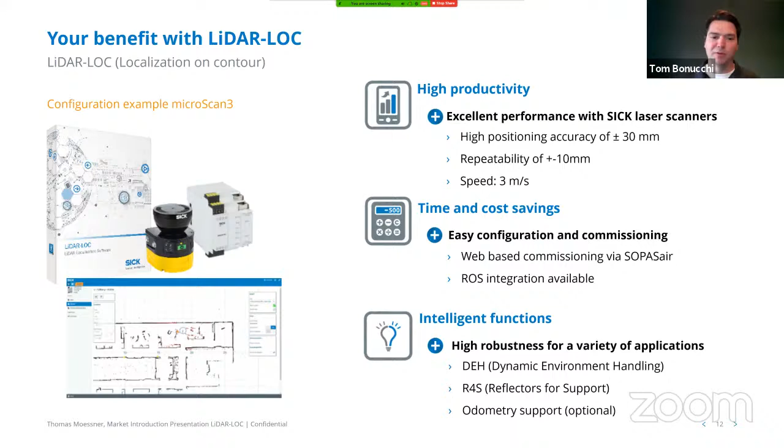There's a ton of vehicles out in the field today that use line guidance or magnetic line guidance, as I mentioned earlier. With this new hybrid feature, we'll be able to mount an inexpensive LIDAR sensor or upgrade the safety scanner on a vehicle and add our CPU and software to it. You'll be able to convert a vehicle running on a magnetic line to one running just on LIDAR. You add the hardware, then let the vehicle run a couple times through the magnetic path, and the system learns what the magnetic sensor is reading and where that is within the environment. Then the system will emulate that magnetic sensor so you can retrofit old fleets with it. It's a pretty exciting new feature.

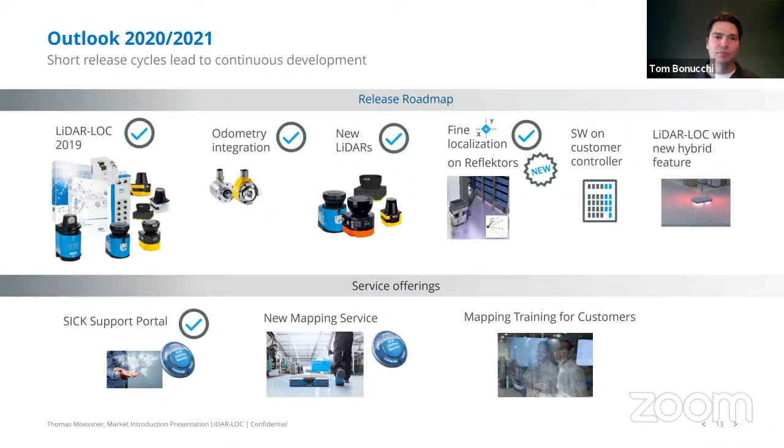We have upgraded our service offering. As mentioned in earlier presentations, SICK has a global footprint and a very large lifetime services organization. So if a customer would like help either with doing the mapping, customer training, or just getting up to speed faster, those are all services that SICK can offer.

With that, I'd like to thank everyone for your time and open up the presentation for questions.

Perfect, thank you. We did have a few questions come in, and anyone can really take this. The first one is: why did SICK get involved in localization?

Tom, you want to take that one? Sure. It's sort of a pretty natural progression as sensors and technology evolve. We've been doing sensors for over 70 years, and in the early days, sensors required a whole lot of integration on the part of an OEM or systems integrator to get them to a functional state where they could perform within the system. As our company's grown and we've seen the need in the marketplace grow, we decided that was a good place to invest some of our R&D — to provide more of a user-friendly solution that can be easily implemented even by an end user. It doesn't require an OEM or integrator to do it.